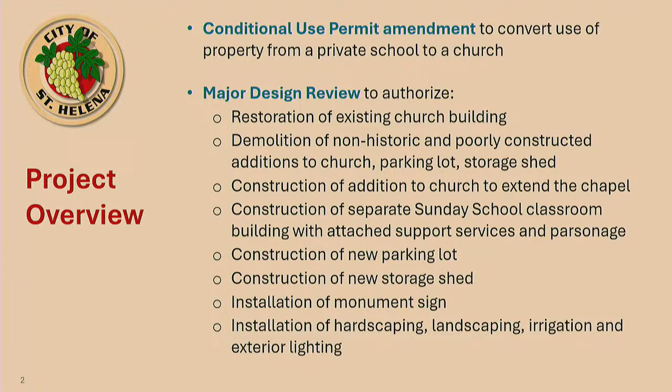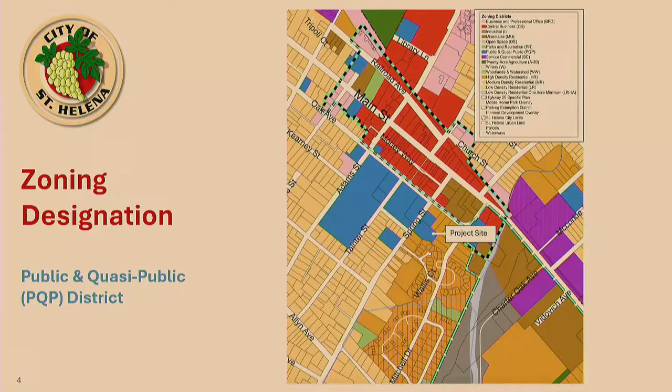As shown on this slide, the Grace Episcopal Church is directly across the street, the Catholic Church is up the street, and the First Presbyterian Church is about a half a block away. It is in the public and quasi-public zoning district, which allows churches as a conditionally permitted use.

A little background on the property: the residence was constructed in 1874. There was a major remodel, basically a conversion of the residence into a church, in the mid-1950s, during which the second story was removed — a very substantial change. There were additional renovations in the 1970s.

Three additions were put onto the project on the north and east elevations. One portable classroom was installed in the rear yard in the early 1990s for the Montessori school, and in 2000, under the city's zoning code at the time, a use permit was granted to expand the school use and add a second portable classroom. In 2008, that use permit was amended to expand enrollment at the school. The 2 portable classrooms have since been removed.

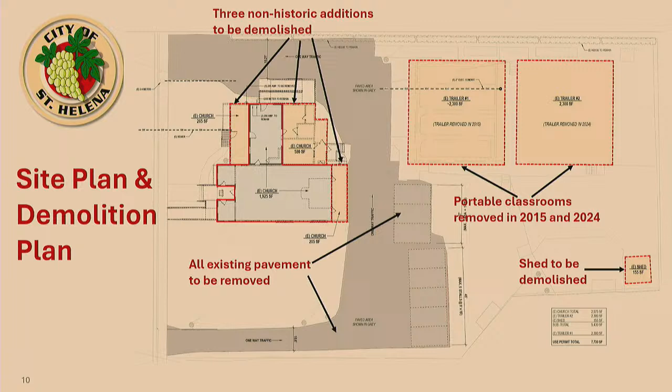But then you can see the 3 additions that will be removed from the church building, and it will be restored to its original configuration. All that pavement will be removed.

This slide shows the site plan, and I know it's really small, but the following slides have some blow-ups, but this gives you the overall kind of picture of what they're doing. So the church, as I said, would be restored to its original configuration.

There's a deck that's added off of the meeting room where one of the additions is going to be removed, and then the chancel is kind of back at the rear of the chapel.

And then there's the new part of the project, so behind the chancel there's an outdoor exterior podium. It's kind of like a covered area that looks out onto a courtyard, and then beyond that courtyard is a covered patio that is an extension of the roof structure of the Sunday school classroom, which is the kind of greenhouse building, which you'll see in a moment.

And then you have the support services and parsonage attached to the back of that. So they definitely are utilizing the property, and then the parking is on the south side, and the whole site will be re-landscaped.

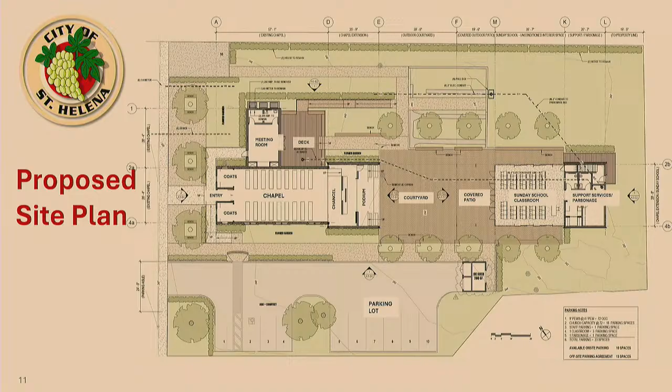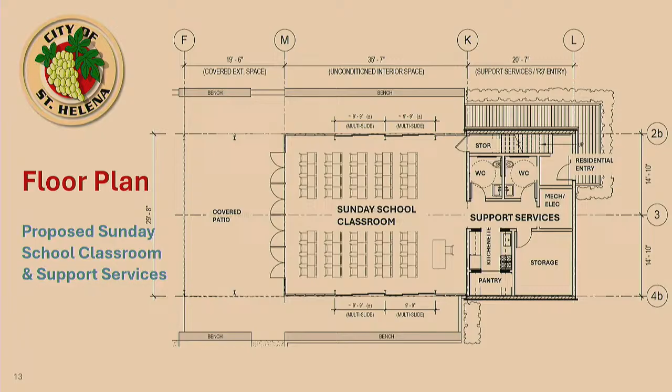So this next set of slides shows the existing elevations of the building and the proposed elevations. So this is the west elevation, which is the front of the building that faces Spring Street. And as you can see on the top, there's the addition on the left-hand side that will be removed.

And then on the bottom slide, you can see kind of the top of the chancel at the back of the church poking up above the roof line, and then there's a steel cross at the peak of that roof.

And then there's improved access and ADA compliant ramps, so you can see the existing ramps that are being removed and some of the new ramps that are proposed.

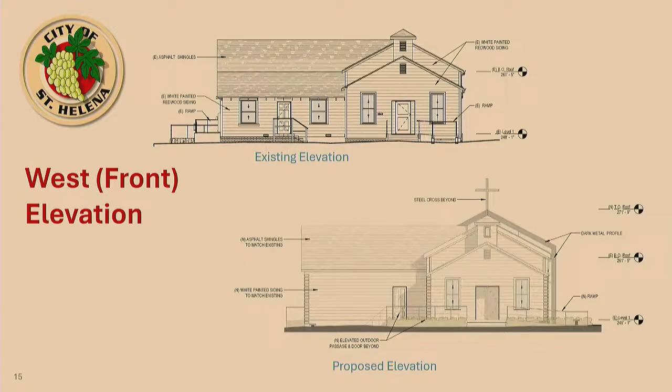This slide shows the south elevation. The existing elevation, as I said, has those 3 sets of historic windows. And you can see on the right-hand side the addition on the rear that will be removed.

And then if you go down to the bottom of this slide, you can see the existing chapel on the left, the chapel extension or the chancel on the right of that, and then the courtyard, the covered patio, the unconditioned classroom, which is that greenhouse structure, and then the support services and parsonage building.

And this slide is labeled as to the building materials. So both the chapel extension and the parsonage and support services building are clad in limestone panels, both for the siding and the roof. And then the Sunday school classroom and that covered patio is a greenhouse system with polycarbonate siding on a metal structure, and then they have sliding doors on both sides of the classroom for cross ventilation.

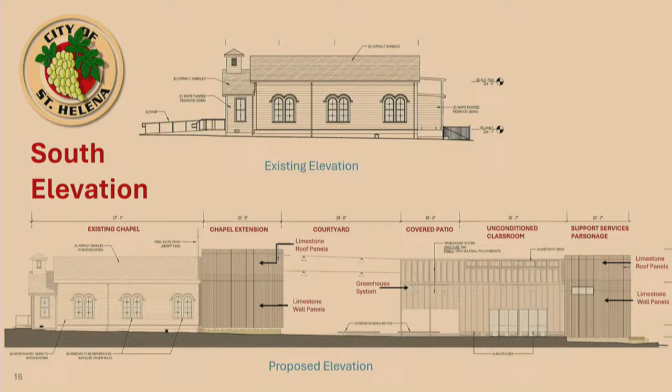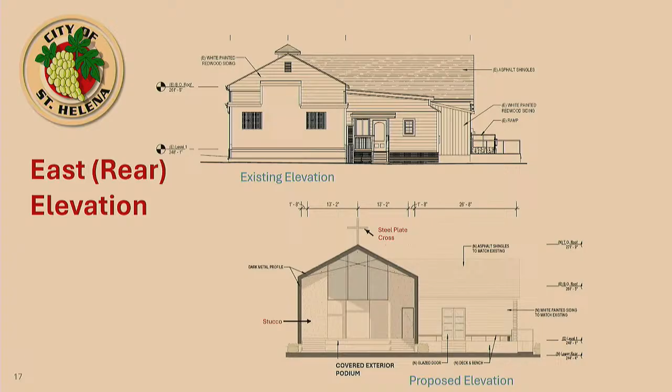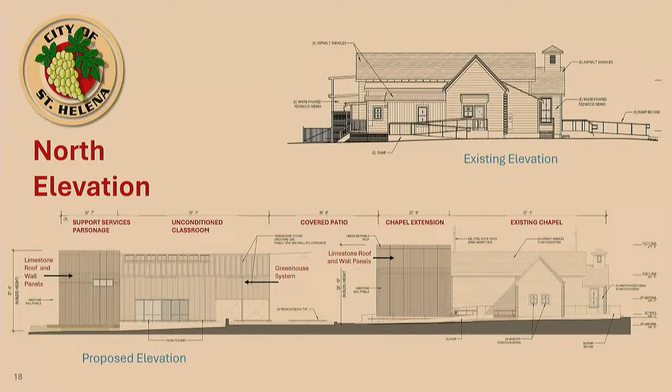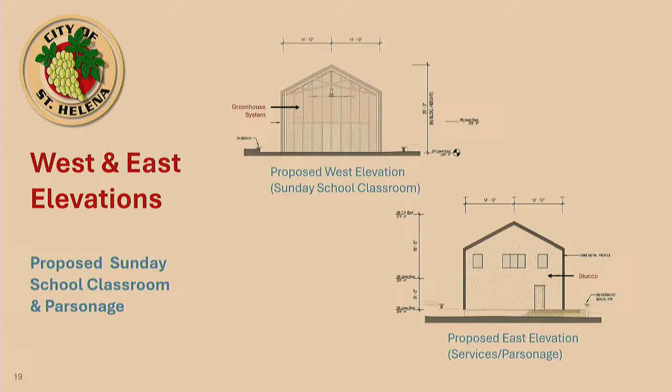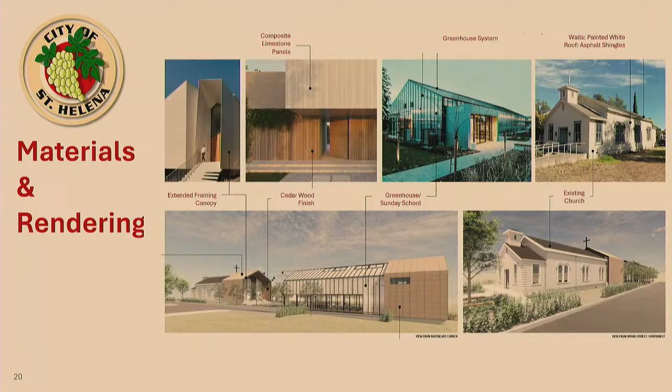All right, so let me get into the analysis here. The project requires a conditional use permit, and there are a number of items that we consider with the use permit. The CUP is needed because it's a community assembly use. Really what we're looking at with the conditional use permit is compatibility with neighboring uses.

In the applicant's project description, and attached to the resolution for the conditional use permit, is a schedule of uses that explains how the project or how the church would operate and the various uses that they expect. It's standard uses associated with the church, basically services, Bible studies, Sunday school, counseling meetings, weddings, funerals.

The parking on the project I'm going to talk a little more about in depth when I get into zoning consistency, but the conditional use permit is where the parking conditions reside. There are conditions requiring recordation of a parking agreement. A use permit amendment would be required if there are changes to the off-site parking agreement, and a parking management plan will be required, just to make sure that there are no impacts to the neighborhood.

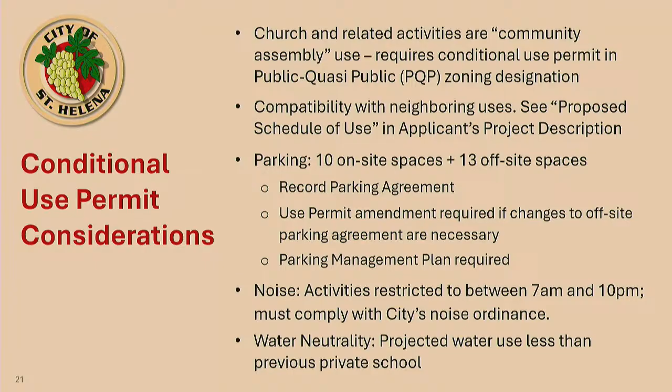The findings for the use permit are consistency with the general plan and zoning, that the use won't impact the neighborhood, and like I said, we have conditions regarding noise and parking. That the site is suited for the use and served by adequate streets. In this case, there's a number of similar uses in the neighborhood and the streets are adequate.

And that the project complies with CEQA, and you will be making a CEQA finding if you go forward with this project. Our recommendation is that the project is exempt from the California Environmental Quality Act under the repair and maintenance, new construction of small facilities, and construction of accessory structures exemptions.

So now I want to move into the historic preservation considerations. As I mentioned, the property's in the Historic Preservation Overlay Zone, and it's listed on the city's local register. The applicants prepared a historic property evaluation and impact assessment report, and it actually concluded that the property is not eligible for listing on the National Register, the California State Register, or the local register due to loss of integrity.

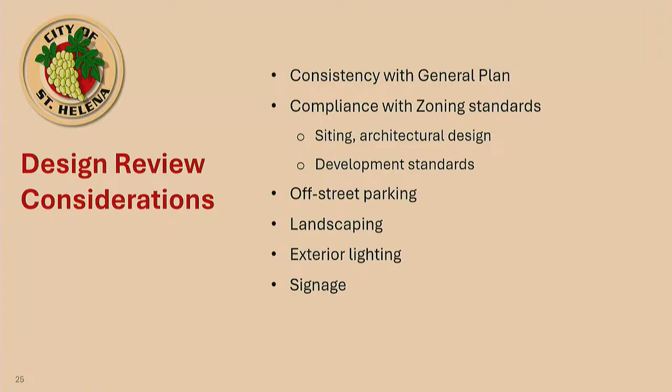Moving on to the design review considerations. We look at consistency with the general plan, compliance with zoning standards, off-street parking requirements, landscaping requirements, exterior lighting, and signage. I'm just going to walk you through these real quickly here.

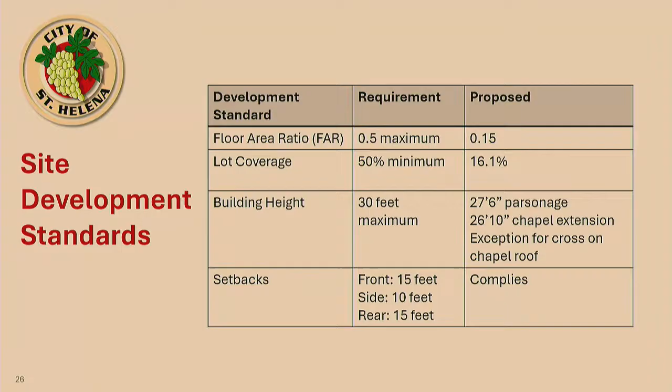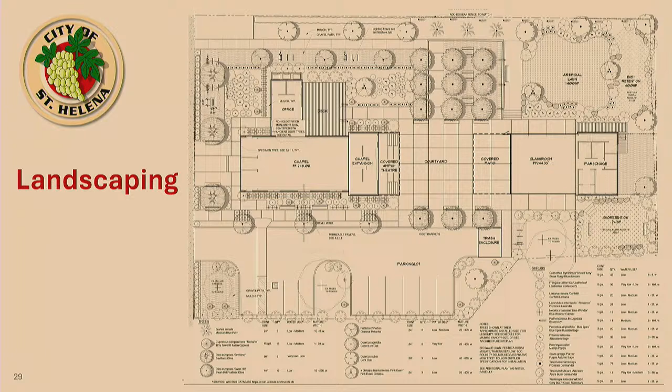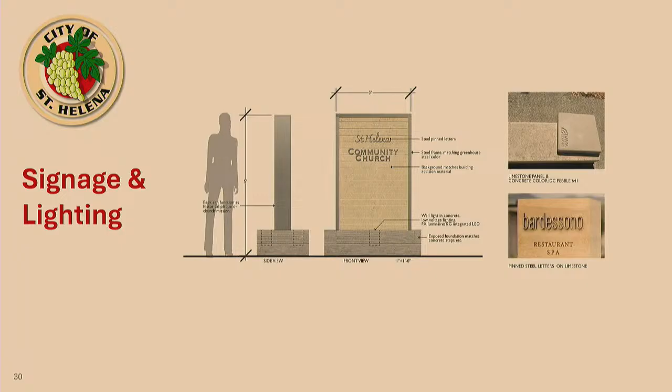Very simple, understated, has some uplighting in the base that lights it up, and it complies with the city's signage requirements. In terms of lighting, they did submit a lighting plan, and unfortunately I don't have a slide of it, but it complies with your requirements, and that's something that at the building permit stage we take a really close look at to make sure it isn't excessive and won't be problematic for the neighbors, especially when buildings like this adjoin residential uses.

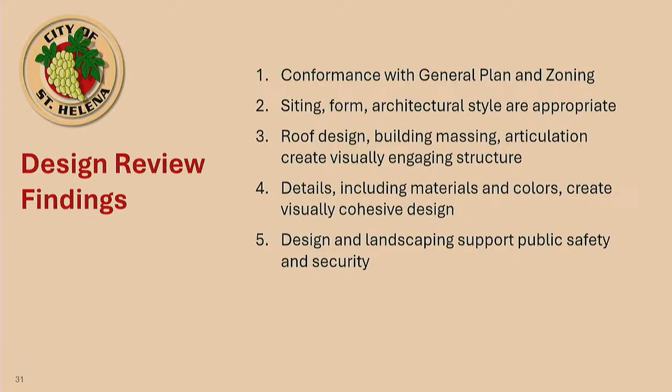This slide just has the design review findings that you need to make. These findings are included in the resolution we're presenting to you this evening, with supporting information: conformance with general plan and zoning, siting, form, architectural style, roof design, building massing, articulation, details, materials, colors, and landscaping.

We had three letters of support included in the staff packet. Two of them are from the same owner—one was earlier and then it got refreshed—but they're basically from the neighbors on either side. One is from the Native Sons saying they're happy to have these guys as neighbors, and the other is from the residents on the other side saying they love the project.